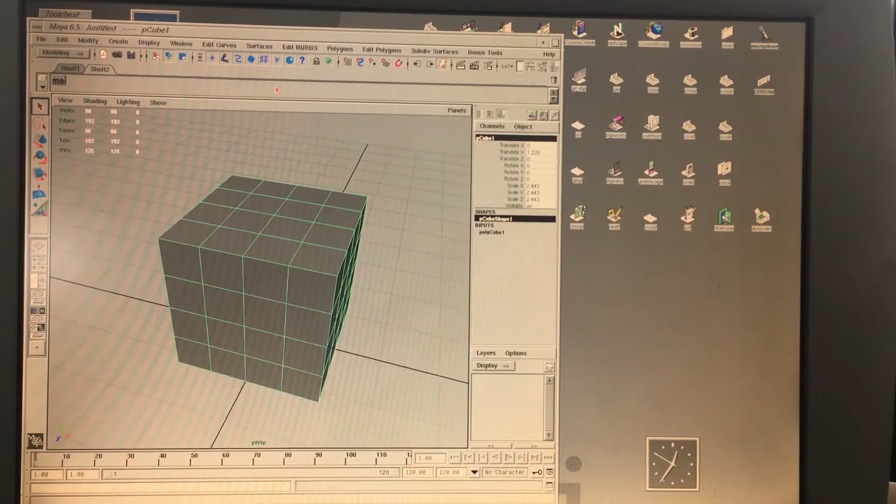So you would say, okay, I want to extrude edges, and you would go into the script editor here, and like I showed you in the last one, you can grab these commands. If we go script, we'll echo all commands, and we can tell it to spit out the commands that happen.

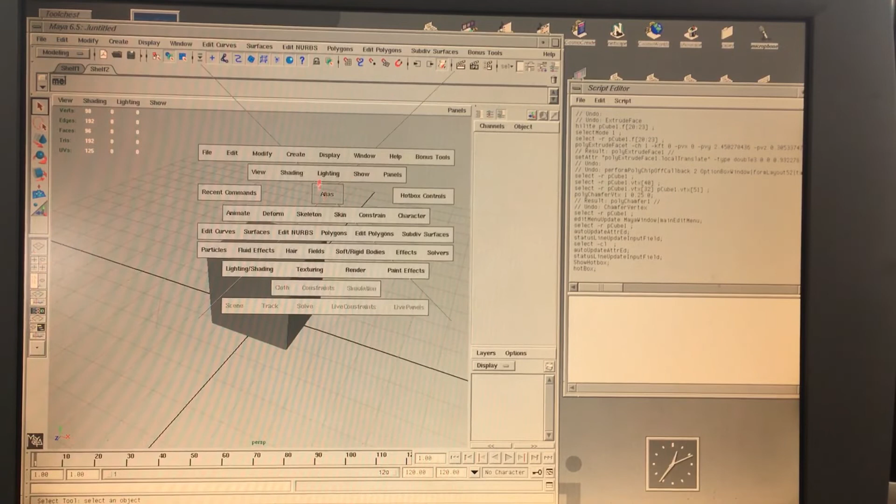And we go, okay, let's do another thing here. We'll space create - I'm about to show you the modeling context here in a little bit, but I need to give you some context before I can show you the modeling context. So open this guy up. We'll just turn this down to one big polygon. You go, okay, we want to get the edges.

I'll right click over it, switch to edge selection, and I'm going to select these two edges. And we go up here and go, okay, edit polygons, let's extrude this edge. This comes up here, and we can pull and extrude that, okay.

Now, this might be a common function that you do, so let's go up here and find out what it was. We'll bring the script editor over, and look at all this stuff here. We said extrude edge - so here's this, and I'm going to middle mouse drag this down here. You can see that's the command. What you can do is select that with the semicolon here, middle mouse drag this up here, and now you have that.

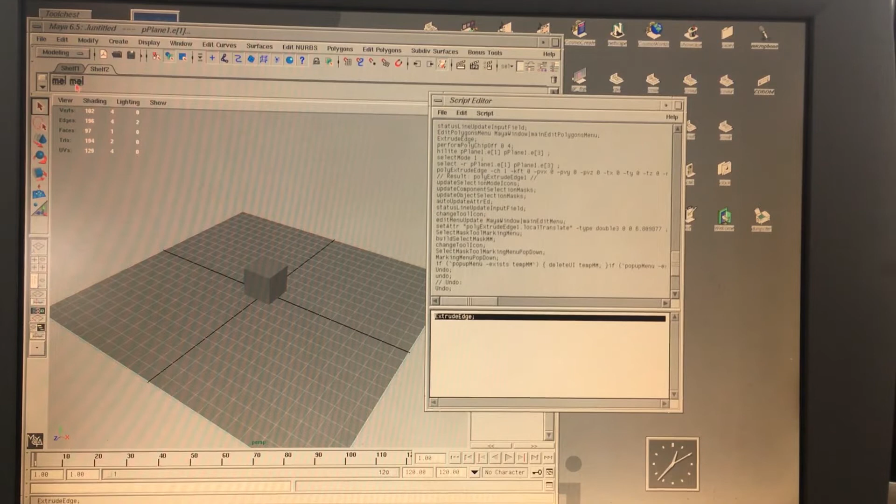And you're going to want to name these guys - you can float over them and see what they are, and you can even make your own icons. You can go into Photoshop and build icons and put those on there. Maybe I'll do that later in this video, show you how to put that together. And now you have these quick keys - so I've got this extrude edge here.

What else could we do? So if I have this object selected, and then grab these edges, you can just do this extrude edge here, and now have this command in a nice convenient place. Well, a lot of people do tools like that - they'll put either the hypershade window and the outliner and a bunch of different panels that they may need, like the graph editor.

You can save that once this spits out the command. When you fire it off the first time, you can save it and put it in places. I've done that here in my hotbox menu. If I hold spacebar and hit right click, you see I have a hypershade, graph, outliner, and UV window, so I can pull these up really easily. I don't have to go chase these things down wondering which one is the outliner or rendering editor or hypershade - just spacebar, right click, and I have this.

Now we can make our own, which we will - I'll show you how to do that. I'm also showing you just how you can make your own shelf if you like.

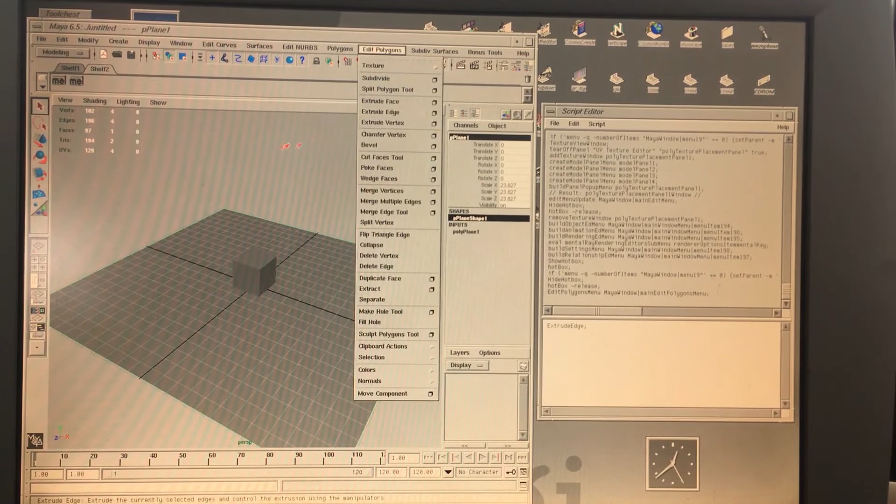Extrude edge is a useful tool. And then what else we have - chamfer vertex is useful. So we can grab that guy and use this, let's grab this thing here. We'll go chamfer vertex, and here it is right here. Grab this guy, middle mouse drag - so there's that command. Same thing, move it up here, and I have this.

So I'm kind of collecting the tools, and I'd make little icons for them in case I forget which one - I can just see it at a glance. So there's extrude edge and chamfer, and I'm making a shelf, and you can add new shelves.

You can do a new shelf, like this should be modeling tools only. So let's get rid of this guy. If you want to get rid of these guys here, you can middle mouse drag this guy all the way over here - there's a little garbage can icon, and you can get rid of it.

Then for this shelf here, we go into this little folder thing here and right click or click on this guy and say shelf editor, and I have some shelves here - shelf 1, shelf 2. I'll just rename shelf 2, you know, modeling underscore tools.

Alright, I didn't even need that - just put modeling, just call it that. So save shelves here - no, it didn't rename it. Why didn't you rename it? Shelf editor. Shelves. Okay, that's the one I wanted to rename. Let's try again. Modeling. There we go, modeling. Here we go. Still I gotta hit enter. Okay, so it's not quite as automated as I was hoping. Modeling, enter, okay there we go. And then I put shelf as like, you know, tools, enter - yeah, there we go.

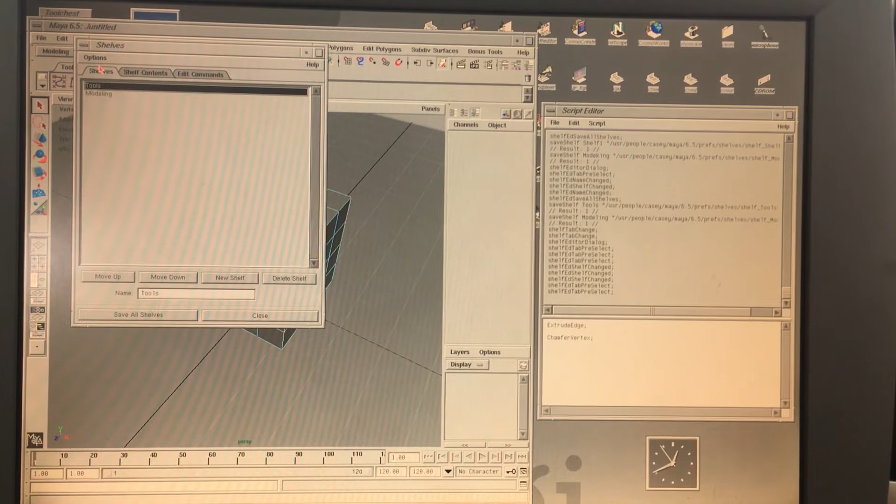So I go modeling or tools, go to tools, shelf contents. Okay, so here we have this - you can see here when you click on those tools that are on the tool menu, you see the little icon here, down here, and it gives you this change image option.

So there's that polycube, cone, and things, and then we could say, you know, change that image, and I imagine it would bring up a file browser, and there's these XPM files - you would have these XPM files for all kinds of things in Maya. There's a whole list, there's all these different things here, and I wonder if they even have more than you see here - there's so many in the icon folder.

So you'd make an XPM file, put it in your user alias wavefront Maya - this isn't the username slash Maya folder, which is where all your preferences are, this is the Maya software, where the program itself is. Then you could put an icon in there, and after you made it, save it to an XPM file and use it. Then point your script or function to it, and it would have a little icon that would help give you the hint of what it is versus just that generic Mel icon that comes with it.

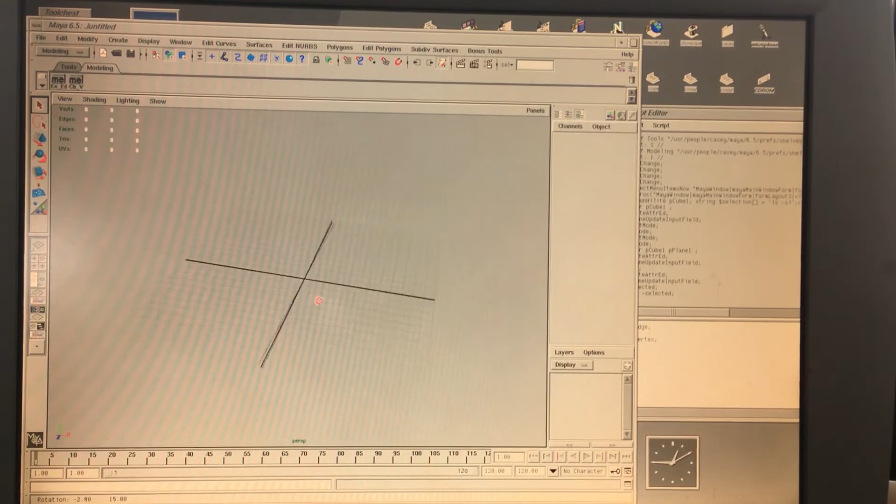Let me delete this guy here. I'm going to start out with a plane now. The shift right click is the modeling context marking menu. So if you have nothing selected and you do a shift right click, it brings up all this primitive creation stuff that I would use spacebar, create for, and then you got NURBS, polygons, subdivs, primitives.

And there's even one I'll link you to that gives you more functionality than just polygons, because right now this is mainly for polygon modeling, but a guy wrote one for Maya 6 and 7 that gives you a subdiv context menu too. So if nothing is selected, shift right click, you have the primitive creation.

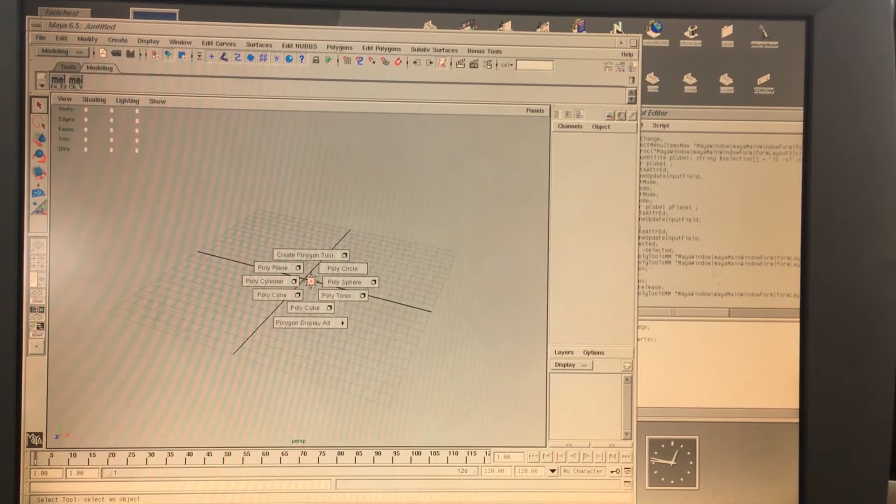So let's go here, we got plane, we'll create a plane, right click, or hit R, scale it up. I'll go in here, grab those guys, drag over so it's just one. And I'm going to turn the shading into wireframe unshaded, and then I'll turn off the grid. So we got this guy here.

And now if it's selected and I shift right click, the menu is no longer making primitives. Because I have it selected, it's giving me object context tools. So instead of having to go look for specific tools that only affect the object level, I have all these tools here that are useful when you have an object selected for modeling. So you have separate and combine, which is useful really quickly. You have smooth, which just smooths out the polygons.

You have draw the split tool, split polygons, sculpt, which we didn't cover. I'll have to show you some sculpting stuff this time. Merge edge, cut faces, append to polygon, and these are really useful when you're in this object mode.

And then if you go right click to the face mode and you have this face selected, and you shift right click, that same shift right click menu changes again depending on the selection. So now you have poke faces, extrude faces, wedge, subdivide, paint. You can do polygon toggles, so you have this polygon display.

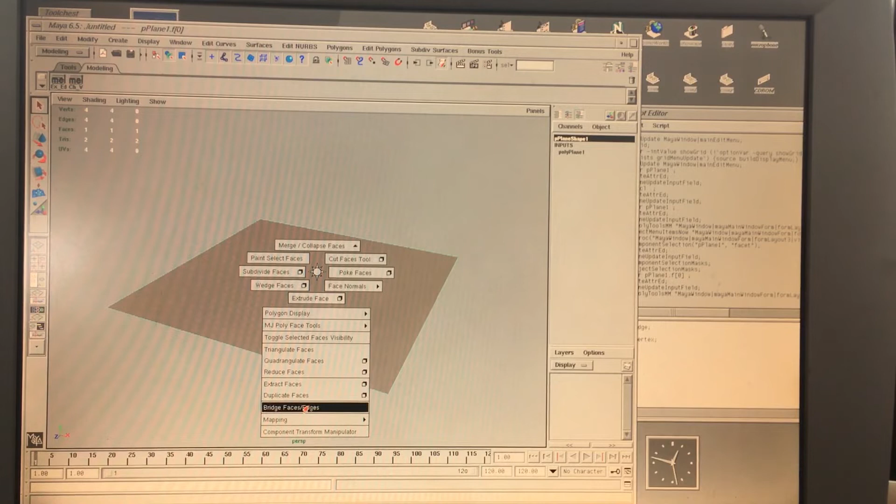This isn't here yet. This MJ Poly tools is included in this menu, but we don't have the MJ Poly tools. And those are pretty useful because they have like loop selections. Triangulate faces, quad faces, extract faces is just to pull individual faces out to separate objects. You bridge faces, I use the bridge a lot. That's pretty cool.

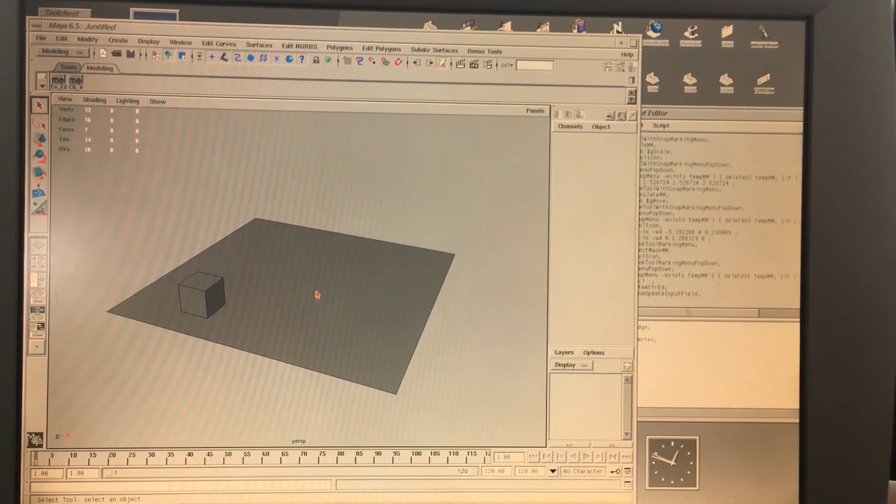So let's go back, let's deselect. So with nothing selected, shift right click brings up the primitive. So then we can go create a cube. And then let's scale this guy over, control drag this guy, bring him up here, deselect, shift right click, polysphere, shift drag this guy up. See how quickly the interaction is here.

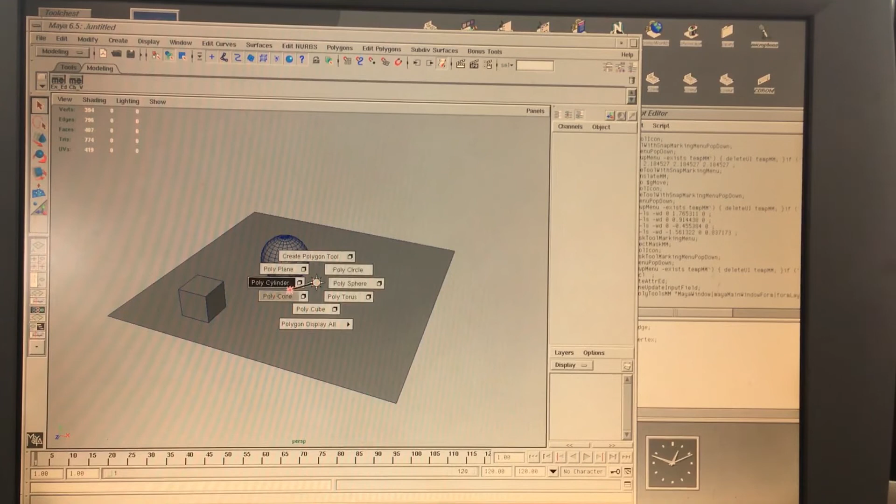This is a way more elegant way to work with Maya, because now the menuing and functionality is way more elegant. Deselect that, nothing selected, shift right click. Let's create a cone. Again, this is how quickly this is to interact with. So I'll scale that guy up. See, put it on the floor.

And let's see here, I'll do this guy, raise the cube subdivisions, and we'll go mess with some of the modeling tools here. So we'll get that guy up here, focus in. Okay, let's do something on the sphere here. I'll click this guy, hit F, zoom in, and let's start messing with the object context. So with the object selected, shift right click brings up, let's do split polygon tool.

So now I can draw some shapes on this guy. So I'll put this guy here. I'm going to start reaching across. Does this one have the snap? Oh, this one doesn't have the snap. But we'll start drawing a, oh, it does have the snap. You just got to play with it a little bit. So draw this guy here, wait till it snaps. Draw this here. Snapping it in the middle. There we go, and then I'll finish it by going up here, hit enter. So I've created that shape.

Now I want to do the edge, and we'll pull that guy in a little bit. Let's hit F, and we'll pull this guy down inwards. So we're kind of making a little machined edge here on the side of a sphere. And now with that edge selected, instead of having to go find it, I want to use the edge tool. So shift right click brings up the edge thing. And let's do the bevel edge. And it breaks it out like that.

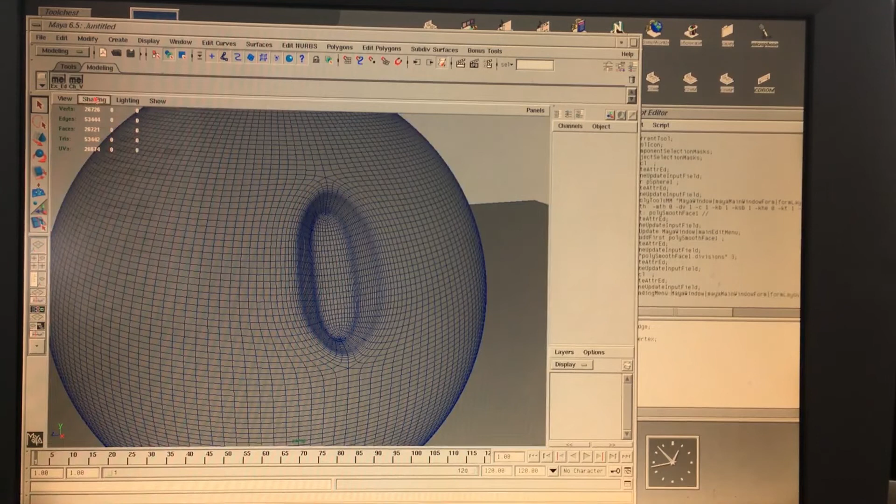Deselect this guy, and we'll turn off the wireframe on shaded. There we go. So I've created a neat little piece; put three of those in a row, and it looks like some mech suit feature detail. You can see this is really useful for a lot of different modeling functions. Let's hide that guy, it's pretty high in poly.

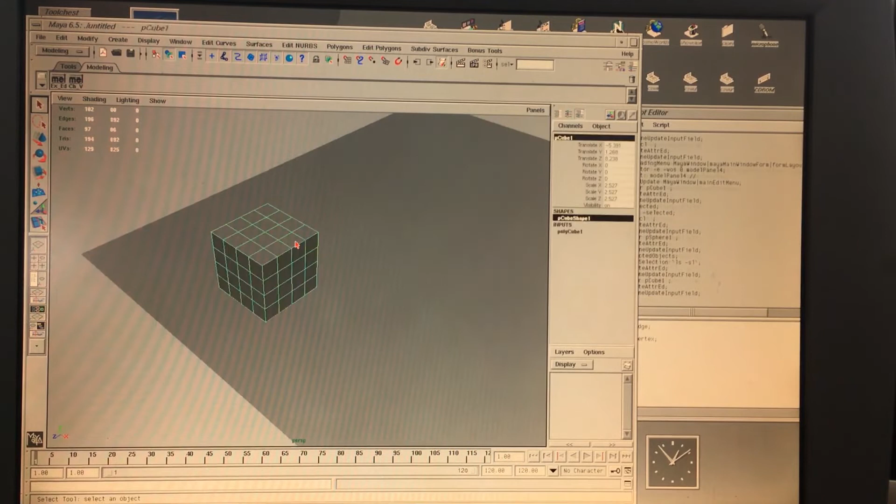Deselect, shift right click, I'll create a cylinder, kind of what we did in the other video. It just allows me to get to things faster. I'll pull this guy up here, zoom in. Let's make this 8-sided, and do the things we were doing before. Show, isolate select, this character only. Now we're using the marking menus to do what I showed you before.

We'll right click, grab these middle verts here. Now that we're in vert selection, shift right click again, and it brings up chamfer vertex. Let's go down to face selection, right click and hold over the object, shift select the first poly, shift select the second poly. I'm going to hit R for scale, and hit control on the Y, so we're only scaling here.

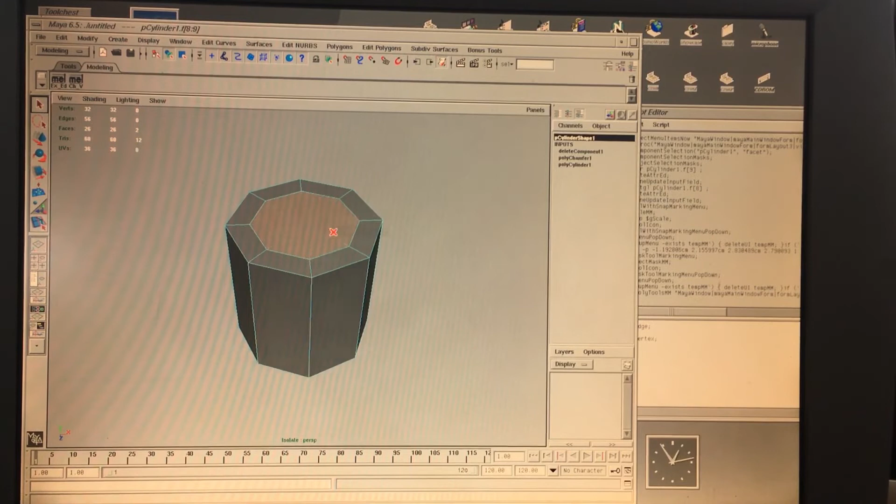And then shift right click on that. So now we got poke faces. There we go. Hit the edge tool and select every other edge, so we can make these triangles into quads. Same thing with the bottom, shift clicking along the way to add to our selection. Then shift right click, and there's the edge context menu, the same shift right click everywhere depending on your selection. Delete that edge, and there we go.

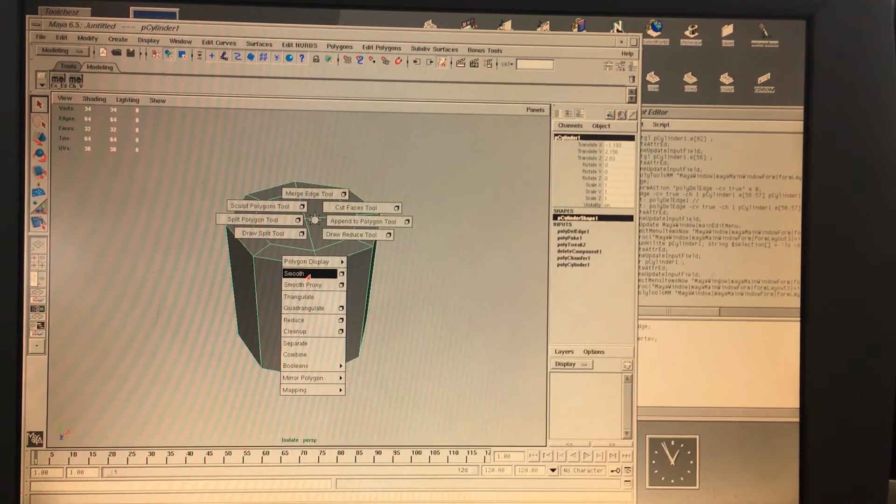Right click here, holding the right click down to put it in object mode. Shift right click at the object level, and let's use smooth polygon. Or we could even convert, although convert isn't here. It's something we could add to a different marking menu, which I'll show you how to do next. So let's smooth that. And we don't have enough spans here.

We'll just do the old cut tool. Hit spacebar out to the quad view, spacebar into the view. Shift right click, cut faces tool. One here, one here, one here.

Let's see, I'm going to grab those edges, and grab them all, and it grabs not only this across, but these, so then I have to control left click to pull the other selections off. So I just have this edge here, and then I can use the move tool to space it more similar to the one above. Same with this, I'll do that, grabbing all the edges, control left drag, control left drag, and then I can use the move tool to push this guy up here.

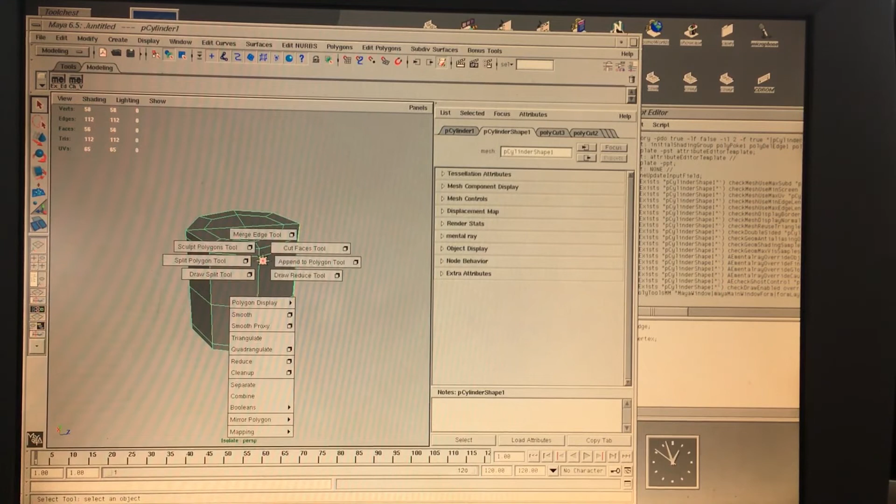There's that, and now we've got enough subdivs that won't bow out into a thing, unless that's what you want. But I put these closer so it'll be a little bit more thing. Shift right click again, smooth. Now it's a little bit more like a true cylinder. It's poly smooth face, divisions by 3, enter. There's our item.

As you can see, that right click modeling context menu can save you tons of time. So create primitives, select an object, object modification, select faces, shift right click, you got face modification, edge selection, you got edge tools here. I do wish that we had this. See here, you have this select loop, this is grayed out. And I think it's because I need to install these poly edge tools. But the select loop is cool. There's an even ring and edge loop split.

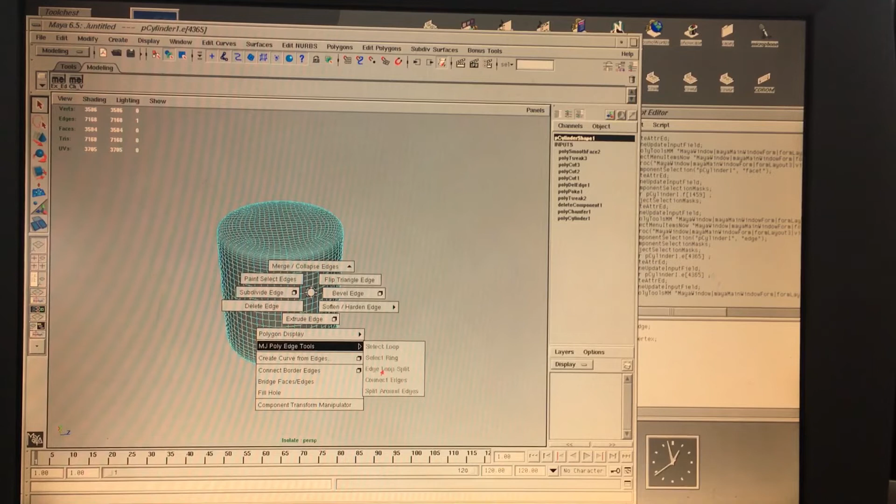This is what we're looking for, because if you have this edge and you do a split, it'll give you a new edge loop. That's what I was doing with that cut faces tool. I can select all the edges, and so if I would say select this edge and then this edge, and I'd shift right click using this with the select ring, the ring will go around this way with them, or you can select a loop, which would make that whole line here. A ring is like the parallel line, so it would go to every one of these along there.

And then when I would use the next tool, which is the edge loop split, what is the modern thing called an edge loop, it would put a line through the center of all these, which allows you to add edge loops really easy. So we have to figure out how to get those MJ Poly tools in this version. And it's amazing they've been around since then, because they're still available on a few high-end 3D and whatnot.

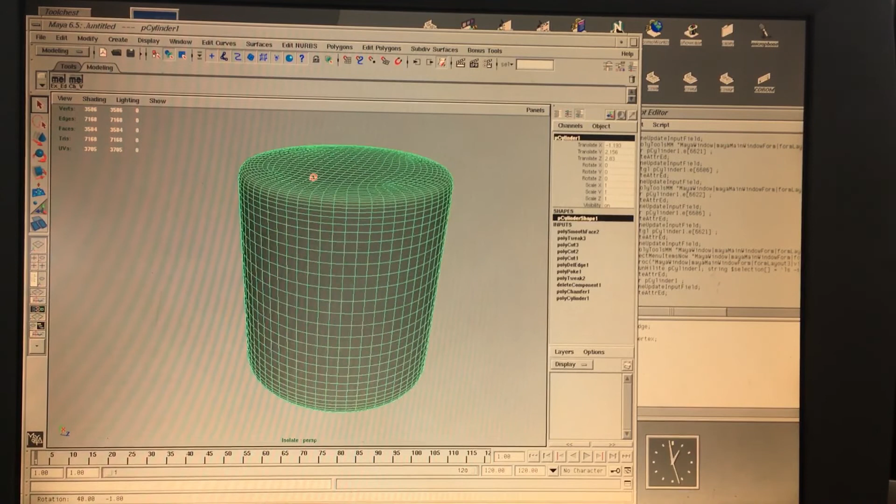Okay, that's one thing. Let's see what else we're gonna do. Make our own marking menus here. So let's look at that. I'll show you how to make one that's similar to the one that I use in the hotbox. We'll just make it clean in the hotbox. So it's like this. I use UV, outliner, graph, which is for the animation curves, and Hypershade to bring up the Hypershade like I had before. Makes it easier because Hypershade's got a couple of menus. You go in here and then you have to go to the rendering editors and go find it. And so having a quick way to get in and out of the Hypershade is really handy.

And if you don't want to bring up the outliner perspective view because you're jumping between the two different views here, you can also just have a floating outliner and get to it here without having to dock to anything. So those are quick little things. Let's try to make those. So I got tools, I got modeling, and let's go here and we'll make a new shelf. We'll do new shelf, just so we can grab our tools that we need for the marking menu.

I can show you a couple ways here. So this will be Windows, like UI, I'll call it right now. Hit OK, and what we're going to do is we're just going to grab what we need here. Now in newer Mayas, I'm going to test this right now. In newer Mayas, there is functionality where, well, this thing's banging around the cup a lot. There's functionality where if you Control-Shift-click an item, it takes whatever you click and puts it on the current selected shelf. I don't know if that's how this works now, but I'll try.

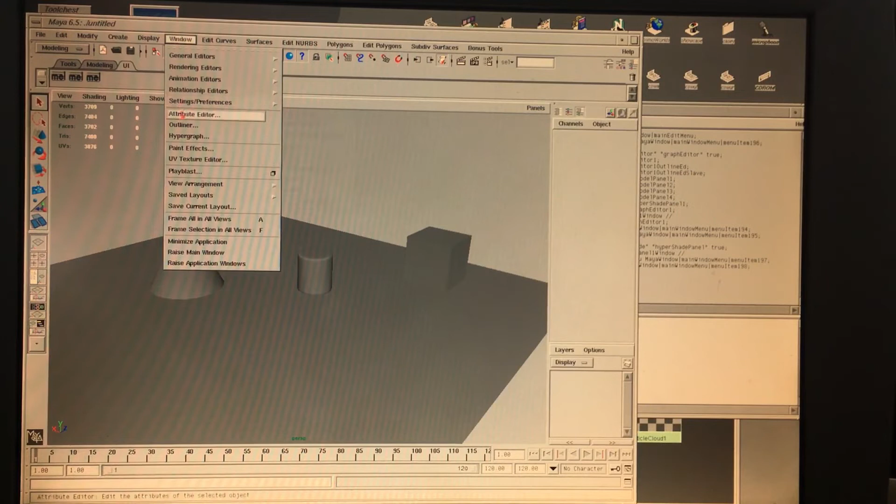We have the Hypershade, the outliner. Oh, we didn't grab the Hypershade, even though I have it. Rendering editors, Hypershade. It's down here, Hypershade window. Drag that guy here. What else do we like? The UV window is the UV texture editor. Something to look at there, and that one should be called texture view window. Yeah. So move this guy out of the way. Texture view window.

Now, what are other ones that I haven't used in the current Maya? There's one that's really handy, this thing. It's an attribute spreadsheet, allows you to change multiple attributes at once. So I like having that one available. This is pretty cool when you have an item selected. Like, let's do the cone, let's do all those. Grab this character here. And now you see that there's this list on the right, and all the similar properties are parallel with each other.

So this one shows you each one's translate X, its visibility, translate Y. You can see the different stats all in one place. It's pretty neat. And you have, this is keyable, this is the shape node keyable. There's some transform information, rotate, scale, and the render stuff's interesting too, because you can turn on and off whether motion blur is enabled. And especially if you use OBJ files, if you import an OBJ file and you don't see it in the reflections or refractions, it's because this is turned off.

And you can see here, if I wanted to make this all visible and refraction turned off, I can drag across this like I did with the channel box here, hit 0. And I've changed the stats for all three of them. Otherwise I'd have to go click, off, click, off, click, off. I've just looked at the attribute spreadsheet with them all selected. I can slide all the way down here, press 1 for on, and it flips them all on. This is a way to mass invoke a lot of stats over multiple objects.

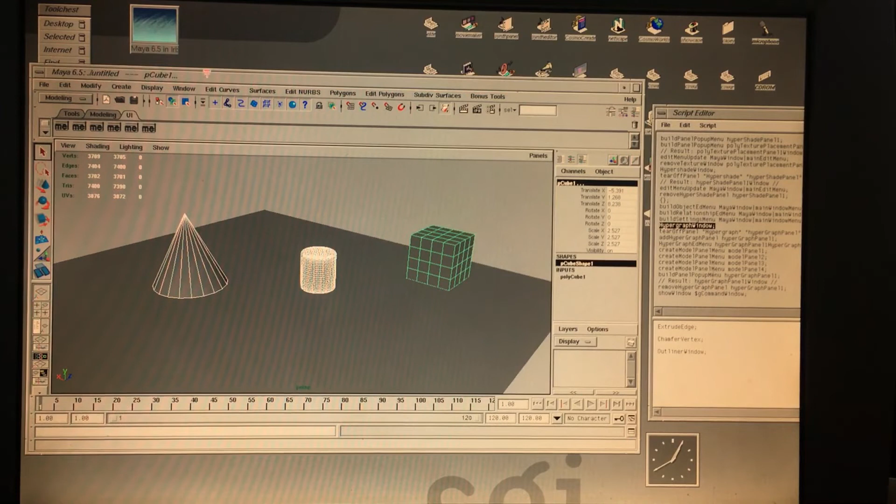All right, so we'll pull this open here, and under Window, under Settings and Preferences, there's this thing called Marking Menus. There's also a thing for hotkeys too, which you can get into, but here's Marking Menus. I'm going to click that, and this interesting little interface comes up, and you see I have a couple. I have a hotbox and another hotbox here, Hbox and hotbox. Let's see if I have anything in here. Okay, I have nothing in here. Oh, I don't want to do that. Go back, marking menus.

Okay, I'm going to delete that one. Do not back up. I'm going to create one, and name it in here. And you can see it has almost the hotbox layout. There's some slots here you can drop things in. And we'll call this menu Quick UI.

And we'll move this over here. What I want to do is like the hypershade at the top. So if I look at this one here is outliner. I like outliner to the left because it's like you're pointing that direction where the outliner button is, and the outliner's on the left. So I'll usually take the outliner and middle mouse drag that over to here.

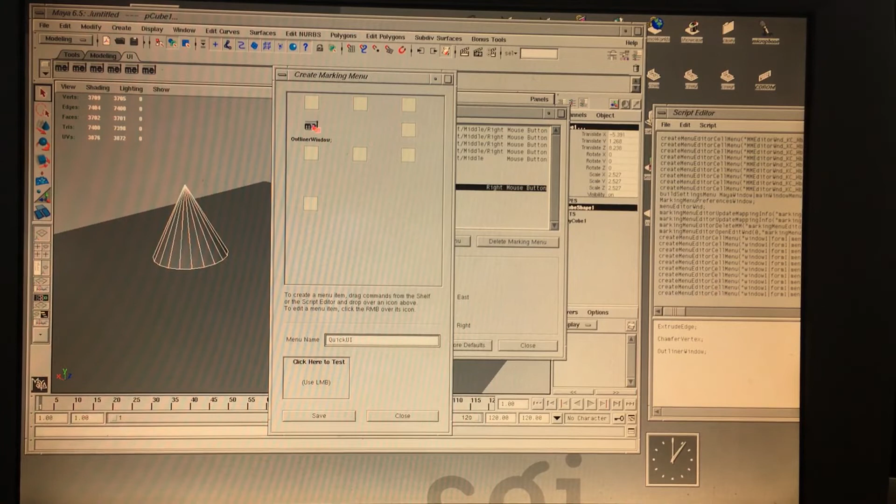It says outliner window, and when you're on this character, you can click that. You have to be very careful about what you click on this thing, or it'll turn it off. So I didn't save it, so I have to start. This is good for you to see, because there's a few ways this thing breaks.

So let's try again. I'm gonna create a marking menu. I didn't name it and save it. So under here we'll do Quick UI, and I'm gonna save it, and it should do that. I'm going to close it out, and now it should be at least saved.

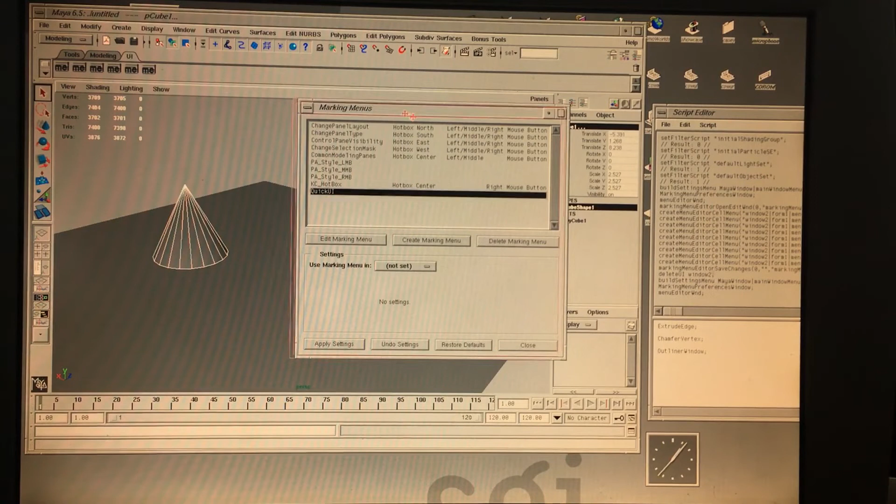So let's see here, marking menus. This is very tricky, the way it can turn on and off here. So now because that's there, the Quick UI can edit the marking menu and brings it up. Okay, now when we save it, we can do stuff.

So I need the outliner here. Let's see, graph editor, outliner, middle mouse, drag that here. I like the graph editor upper left here. I like the hypershade above. See, there's texture view, so put the hypershade up here.

Texture view is the UV window, it's down here. And I got this attribute spreadsheet I like putting way below. And what else? We got hypergraph window, so this will show us what's connected to what. And then what else would I use over here? This would be a different hierarchy. But this is a pretty good start.

And what we want to do is we want to modify these, because it's going to say what these are. See the text in each one. So I'm going to change that. We're going to edit each one so it's a little bit more brief than what all those words there. So I'm going to right click this one at the top and say edit menu item, and it brings this up and it shows you what's inside.

And so it's got, hey, I'll use this icon. So you can make these special icons just like you saw with the other shelves. You can point it to an icon in the icon folder. Just if you have a name.xpm in there in the icon folder, it'll find it and use it. And so we have hypershade window. So here's the command. You don't want to modify this because this is the mel command it's going to do, but here is just a label. So I'm going to remove that window part with that semicolon, just call that hypershade, and then save and close.

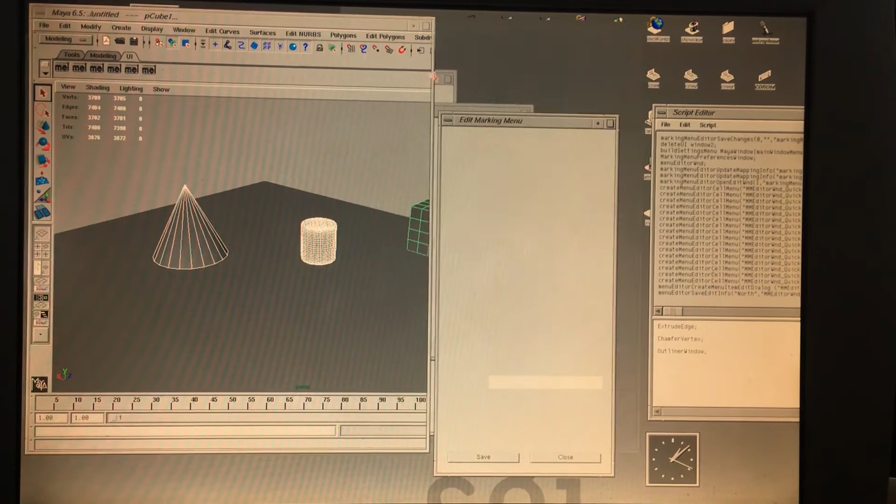And it closes the whole thing out again. Closes that, puts it behind. Let me try to get this so it's not right over the top of Maya so we don't lose it every time. So now you can see that it says hypershade, and now I'm going to go over here, the same thing, edit menu item, remove the editor part and just leave the graph.

Save and close. Right click on this one. Just cleaning this up so we can change the labels. Edit menu item. And like I said, if you want to make your own XPM files to make little icons that you would recognize, that's definitely encouraged. I'm just going to call this UV.

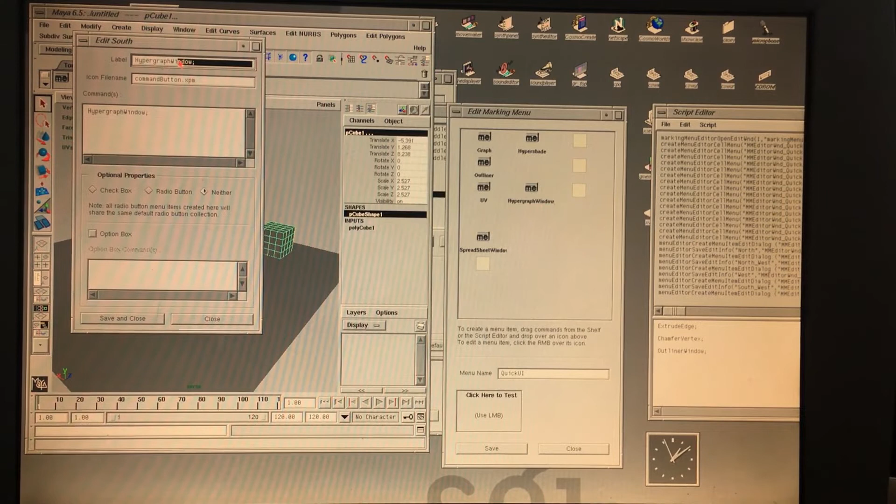It's easy. And edit menu item, hypergraph. Here, save and close. And edit menu here. And I just call this one, since it's an attribute spreadsheet, I go attr.ss, attribute spreadsheet, save. So that's easy for me to see. Okay, so save that.

Let that save across here. Now if I test this, you can see, use left mouse button. You can test it, and you can see it's got your little items in here.

And then we need to assign this to a hotkey. So I save that, close once that's saved. Now we have to assign this to something. In this one here, I assigned it - you can hide Hotbox or Hotkey Editor. My original one's up there. I'm going to use this quick key, the one I made, the Quick01. Let's go down here and use the Hotkey Editor.

And it's not set yet. So it says the marking menu will be available for editing in the Hotkey Editor. Apply settings, and now it says accessible in the Hotkey Editor.

So now we're going to go to Windows, Settings and Preferences, and go into Hotkeys. We're going to give this little menu a place to live. What you want to do is go into the categories, and you have to go all the way down to the bottom where it says User Marking Menu - these are the custom ones. There's just one there because that's the only one that's assigned.

And you've got to press and release. If you assign the press, it'll ask you to assign the release the same - letting it go will take it away. That's usually the standard thing.

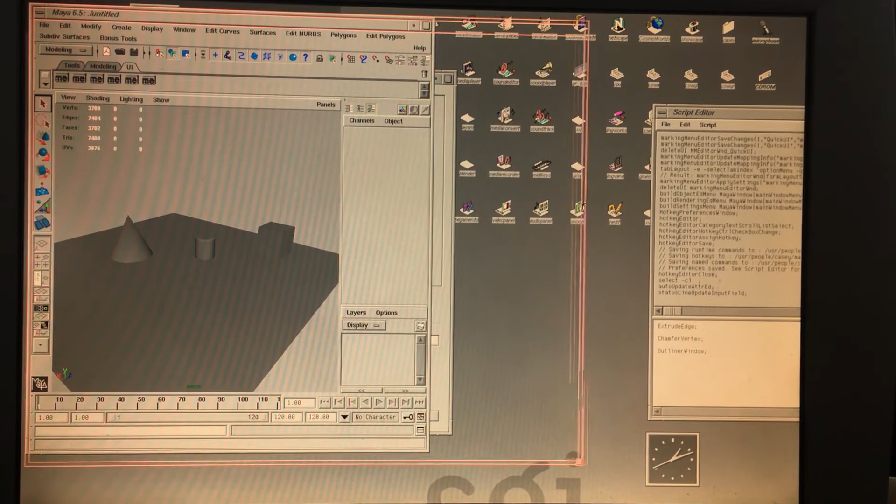We should be able to turn on the shading here, wireframe on shaded. Now I can get those menus - if I hit Control Shift Z and then left click, there's my menu, so I can invoke any of these.

I don't even have the whole hotbox. Before I had right click, spacebar right click, and it's kind of in the middle of the hotbox, which is quick. But now I just do Control Shift Z left click, and I can grab the graph and change my animation curves here - there's no animation, so nothing shows up.

I can shift click these guys and then Control Shift Z left click. I want to look at the attribute spreadsheet, and now here we are at the spreadsheet. And then what else do we want to do?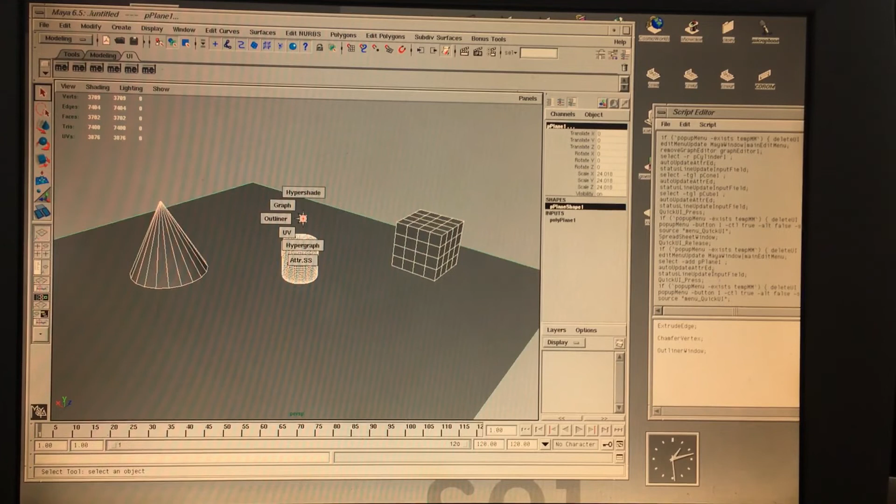We want to do Control Shift Z for the outliner - you get to your items real quick if you don't already have an outliner open, with this button here. So these are quick ways.

Oh, I just need to check out the hypershade - Control Shift Z left click, grab the hypershade. So this is a way faster way of getting around Maya if you understand how the UI works and the way you can customize it.

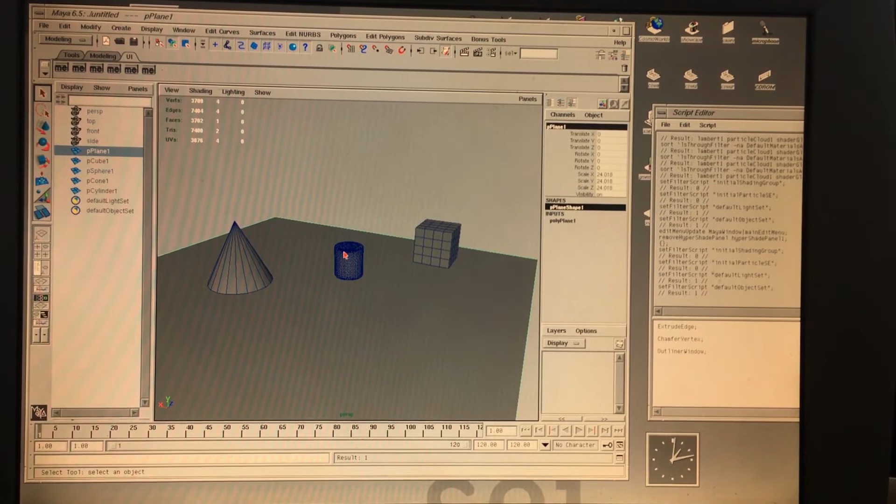One more thing I wanted to show you before we finish the video - yeah, we're coming around an hour here - is how to create macro functions. That involves a little bit of understanding of Maya scripting, more than just taking the command and applying it to a button - it's about creating multiple functions that happen all together in one. You can do it with modeling functions, but one of the ways I like to show people in the first tutorials is to create...

We'll do another shelf here, like a new shelf - we'll call this one Render. And we'll hit OK.

Here what we're going to do is create a high and low, like a preview or a production setting. That's available when you go to render globals. You can save these things - they have this preset option. So when you make the preset how you want, with everything set up, let's go here and we'll make it mental ray.

This is kind of like the last tutorial settings I'm going to use, but we'll do a few more things. And look at all that stuff it's making.

Go over to the mental ray tab, and then there's a few things we can create here. So they have these presets already, like you can create this draft, and then they have preview, which is a little higher, and then production, which is even a little higher. And this is mainly saved because you can save the presets in the render settings, which is fine for you to do stuff. But maybe you want to be a little bit more specific.

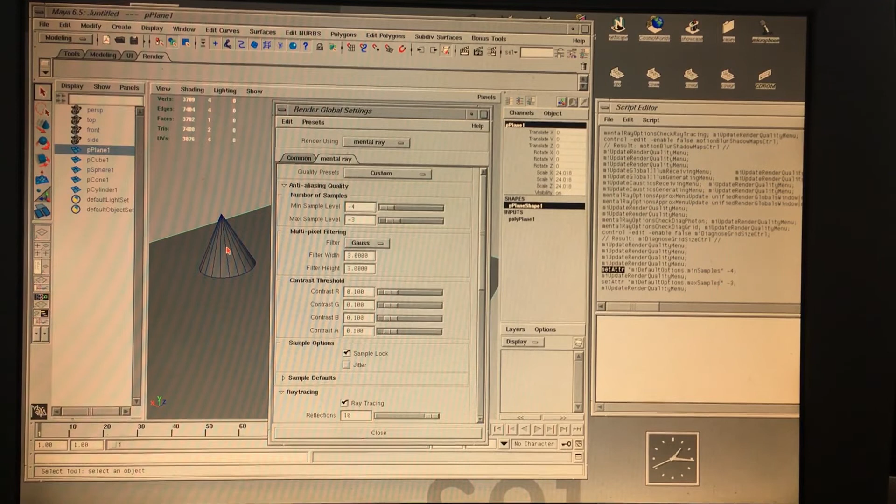You can have it spit out, like if you want to grab the position of something, you know, I'm selecting this. There's one you use a lot, which is select, which is a select command you use a lot. Select, you know, flag R, like -R is recursive, or select add, which would be adding something here.

Let's deselect and try this here. Just kind of show you playing around with mel. So I got select R cone, and then let's copy this here. You can use the add key here, enter, Control V, and then instead of R, I'll hit A.

I think I can add, right? Or do I have to actually type the whole thing? Control, right click. It's a valid flag. I guess I have to do add, ADD. Select add to selection, pcone1. There we go, so it selects it.

So, but what we're gonna do is we'll do pcube1. So I have this select, I'm showing you how to do multiple commands. So select recursively the pcone, so it lets go. R is gonna let go of whatever and then select it. So recursive is like starting over.

And then we want to get the pcube, so I'm going to type this up here. It's pcube1, so I'll type CUBE, that's the transform name. And so now I'm selecting the R cone and I'm selecting adding. I'm not going to deselect the cone, I'm going to add it to the cube. And so I run those two together by selecting.

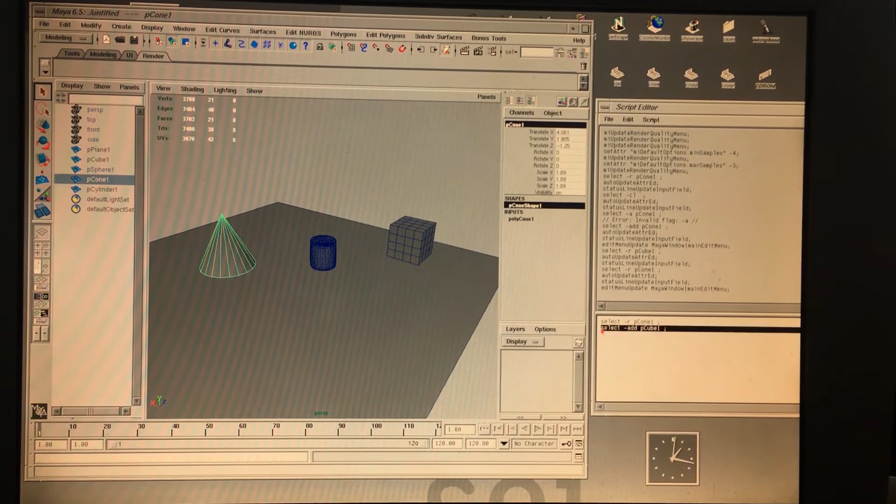You hit Control and enter if you hold Control and hit the enter on the far right, the numeric pad enter, while holding Control, it won't make the text disappear. It won't empty the text from your text editor. It'll execute it and leave it there. So Control Enter, and you can see that, yeah, it's done both those commands. And so this is like stacking mel, so you can do multiple things.

Not in this tutorial, I could point you towards one where you learn how to do the variables, like saving something in a string, and then when you're not selecting something. I'll show you, but I'll try to show you real quick, though it won't click right away. But you can save things in Maya to variables using mel, and then that becomes something that you use in like a for loop to do one thing multiple times to multiple objects.

So like if I wanted to save this selection, let's see if this works in the same way in the old Maya. Here we go: string, dollar sign, my lowercase, uppercase S, EL. I'll make it an array, so it's the brackets, and I'll hit this, and that will equal the command.

ls -sl, and I have to put those little quotation marks up there. And so this is me saying save into this variable string this command, which is list your selection. This is stuff you learn over time.

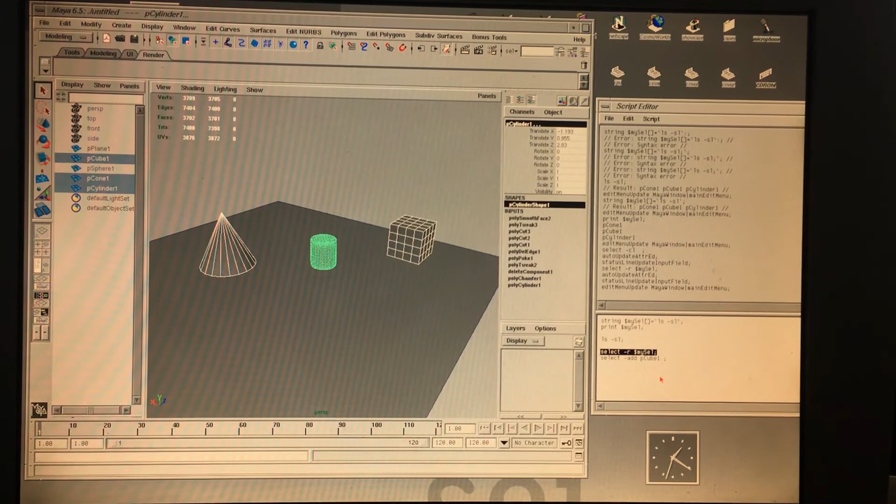I'll just give you a quick example: you can do that with modeling tools. There's a lot of things you can do there. You can create a for loop so it saves items into a selection, and then it runs all those items through all the commands in a for loop. So for every item in an array, do this, and you can have a whole bunch of commands happen to multiple items in one simple command.

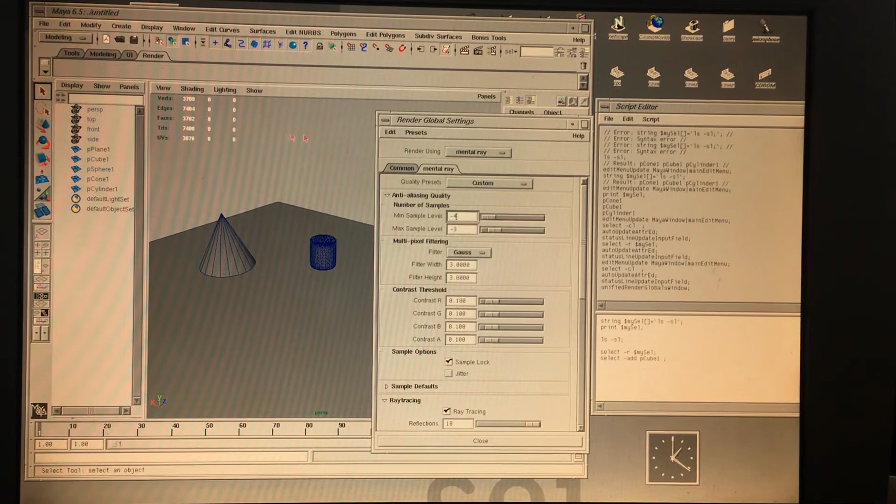But what we're going to do is use this to save a couple of settings for Mental Ray here. So get rid of all this. We want to save these things. So let's clear the history, and we just want to get some stats from Mental Ray. So I want to hit this thing. I'll hit -4, hit enter. It says set the attribute to this. So setAttr miDefaultOptions.minSamples, and that's in quotes so it knows to look for that, and -4 is the setting.

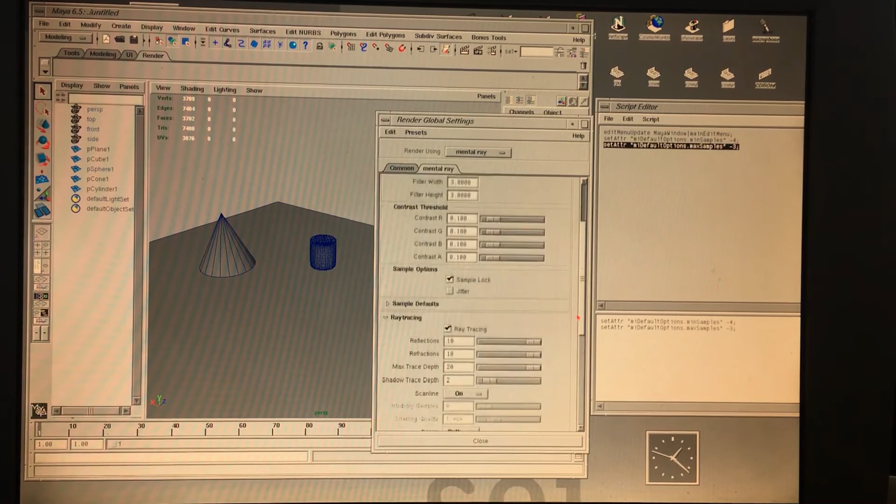And then we got this here, 3, enter. Same thing, I'm grabbing this one it spits out, dragging this down here. Whoops, get that at the end, hit enter. And that's our setting here. Ray tracing is already set up. So we have this setAttr, so you could have saved it in Mental Ray.

You have this custom thing, you can save them here, or you can use those custom presets. But what we're going to do is create these buttons here so you can set these things high and low for yourself. So instead of going in here and turning on these menus, we just have a quick little button that lets you switch the quality really quickly. So for previews, we got these 2 commands in a row. Default options, minimum samples -4. Mental images default options dot max samples -3.

I'm going to middle mouse drag those guys here. We'll go in here and go to the shelf editor, and this is edit command. So there's the 2 commands together. There's the contents, and we'll call this min, or we can call it low, whatever makes more sense to you.

And then we'll do another one that's a little easier to see. So if you have -2, -1, grab all those guys here, and then we'll do one that is a higher quality, which is -1 and regular 1.

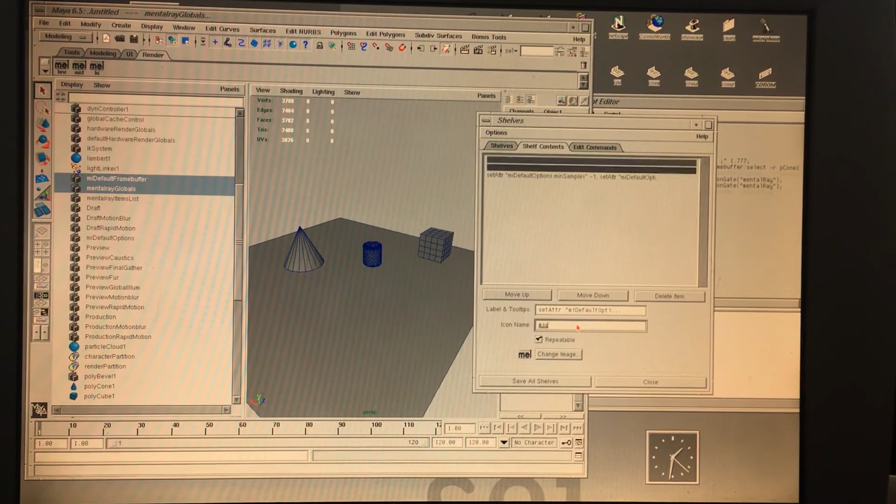Didn't save the mid here. MID, enter, save all shelves. So now we have this quick way of setting our settings here. So let's watch this. So we have this too. So it's committing 2 commands every time.

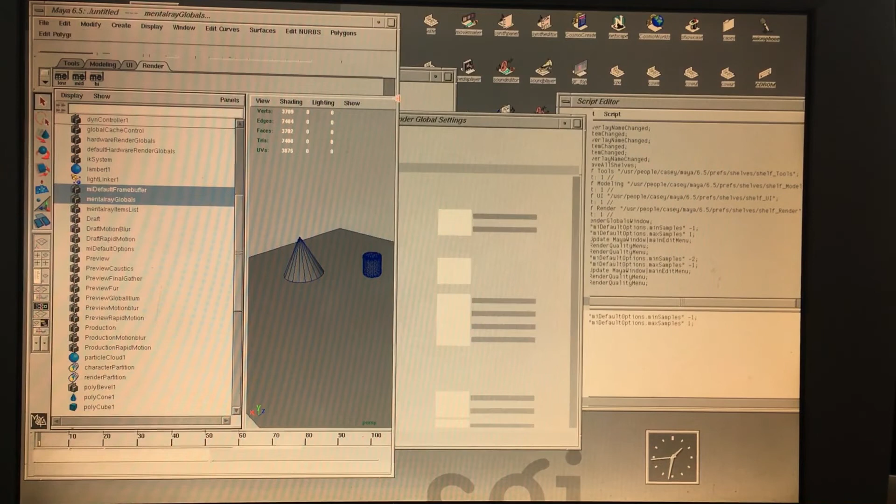So if we're on low, let's hit high. See, it sets them. -1, 1. You can see that it's running those commands. Let's set it to medium. Oh, move that out of the way also. So there it is, -2, -1, low, medium, high. And it's just running those commands in a row with each other. So we have that set up for MentalRay.

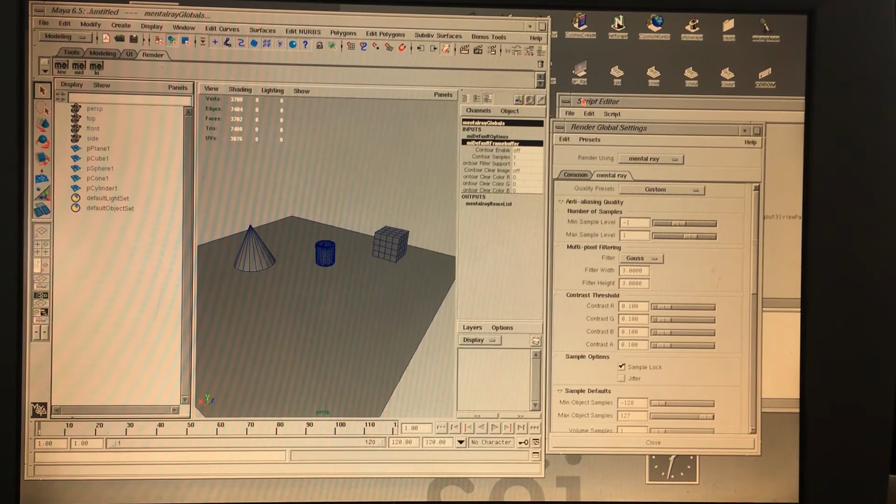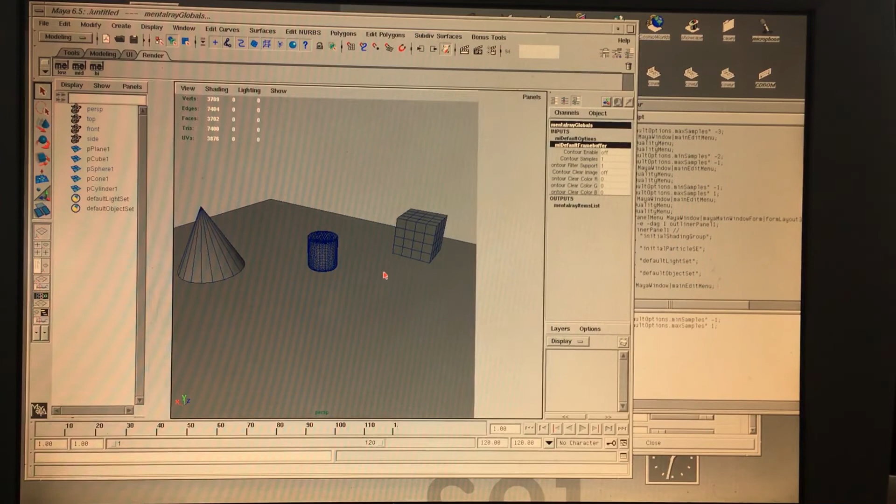So, okay, let's look at this light setting here. One thing I didn't show you, let's turn this DAG objects off because I was trying to find that. One thing I didn't do last time was we ended up using the area light to light the scene, but I used the quadratic fall off, which is a more physically accurate fall off as far as the light transport goes, but you end up fighting with the hot spot versus the dark spot. And so even though it's a nice fall off, it's an accurate fall off, there's these aspects to it. You have to keep balancing the shaders.

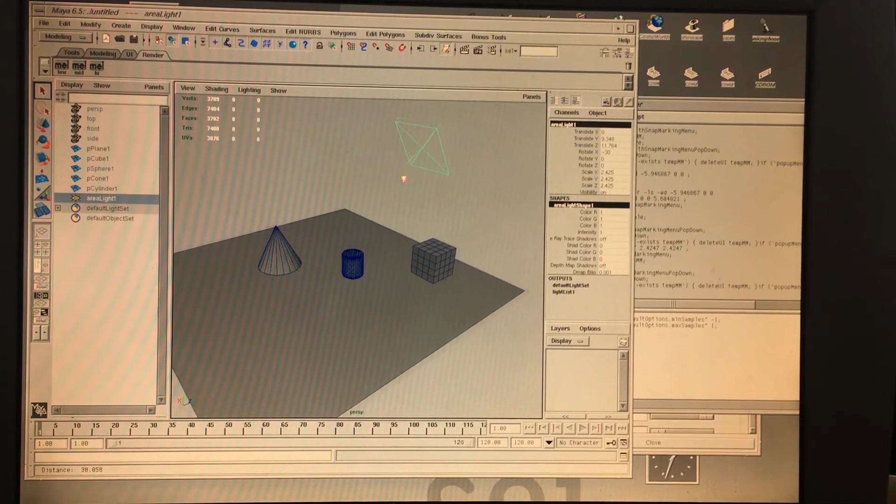And so one of the things I wanted to do, which I should have done last time, is space bar, create an area light here, and we'll set this one up so that it is set with the linear fall off. It's not physically accurate, but it gives you a way easier spread for the quality of the lighting. So you do get a fall off, and it feels nice in photoreal. So with the decay, let's use linear instead of quadratic. The shadows is the same. We're going to go down to shadows, use ray trace, and I usually just turn this up to 8. It's a good default.

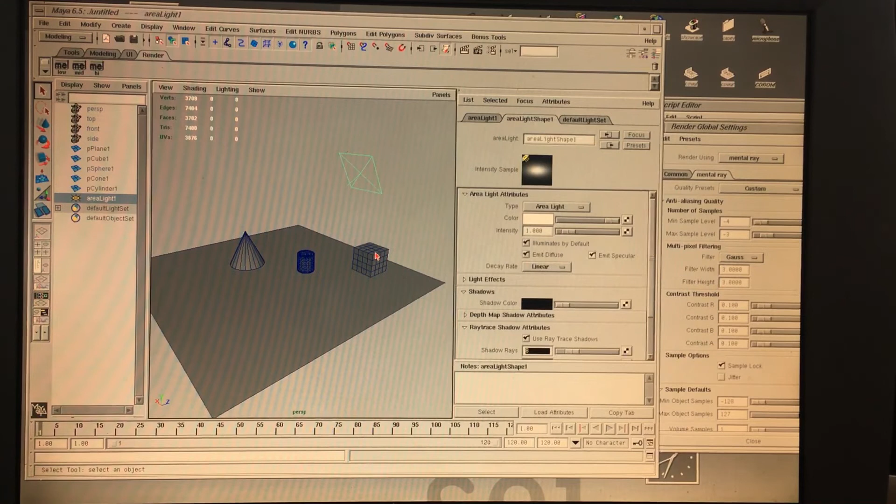Okay, so now we just want our low settings. Let's get our MentalRay up here. Put on low. And maybe before we do that, we'll smooth these guys out. So I'll go down here, and let's see, what can we do? We can round this guy out. Let's go to the channel box. This polycube. Let's do 3 divisions, maybe. Or maybe, I don't know if the bevel works the same on this newer Maya. Let's try 1 real quick, and see if the edge bevel works the same in the new one with the corners.

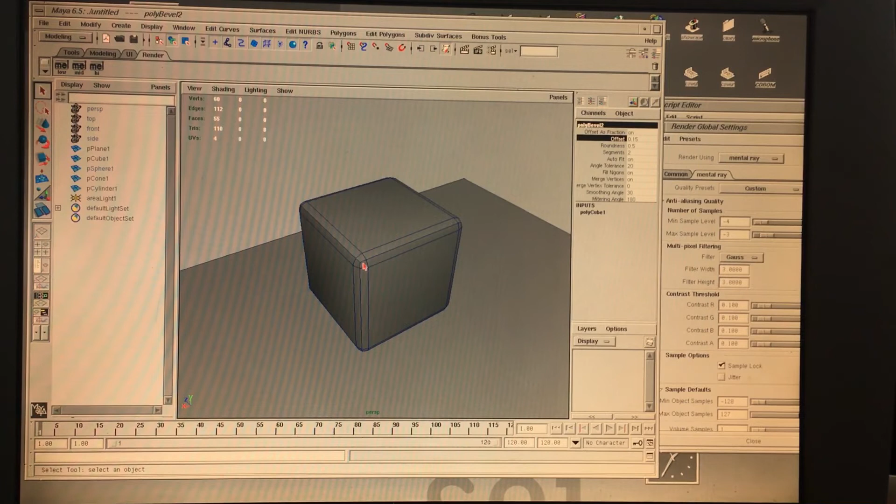Okay, I've got all those guys. Shift right click like we were looking before. I've got this bevel edge. Let's see if it works with the corners, because the newer Mayas have this segmenting. Oh, it does. Wow, look at that. See how it caps the corners nice? That's great. So now it's as if I added edge loops, and then I'll just use the offset, middle mouse drag, hold control shift when you middle mouse drag, you can get it in there. So now we've got a nice cube that can be rounded really easily, because it puts nice quads on the corners. This is a really cool feature I use all the time in even the newer Mayas.

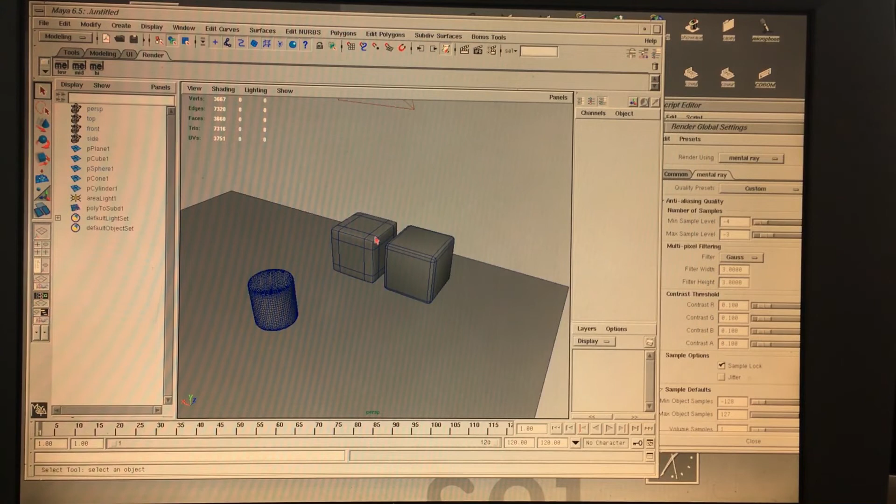So now we have that. We could convert that to a subdiv, or we could smooth it out like this. Let's see how it converts. Modify, convert. Control D so I can duplicate it here. Modify, convert polys to subdivs. Let's see how well it subdivides. Yeah, looks pretty good. Then hit 3. And that looks pretty good. And then we got this, shift right click, and we'll just use the smooth on that guy. And I'll put the divisions up to 3. That looks pretty good too.

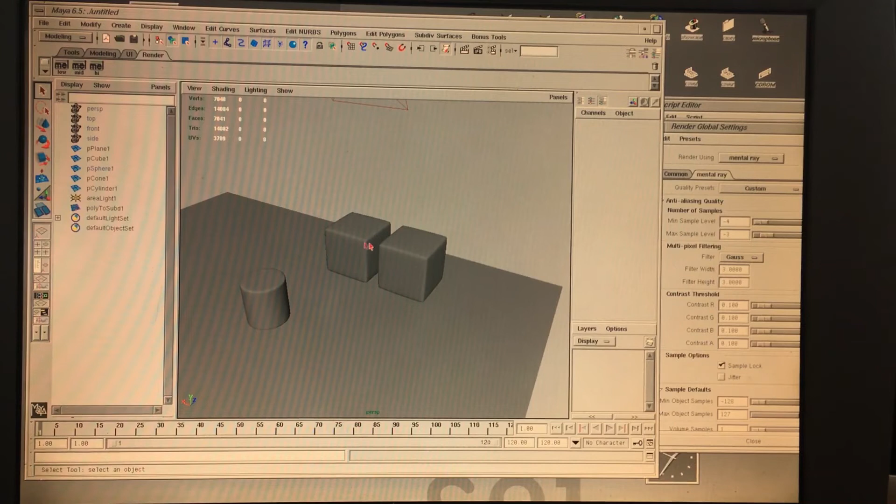So let's turn off the wireframe on shaded. That's another thing I could probably make a quick key for, turning that on and off. Let's see, fit. Yeah, boy, that looks really good. This is like what I get in my modern Maya, because I just convert the polygons to NURBS with the 3 key. It's very low poly, but subdividing really nicely. It looks really cool with reflections rolling across it. Okay, Control H, I'll hide that guy. Let's do the same thing with this.

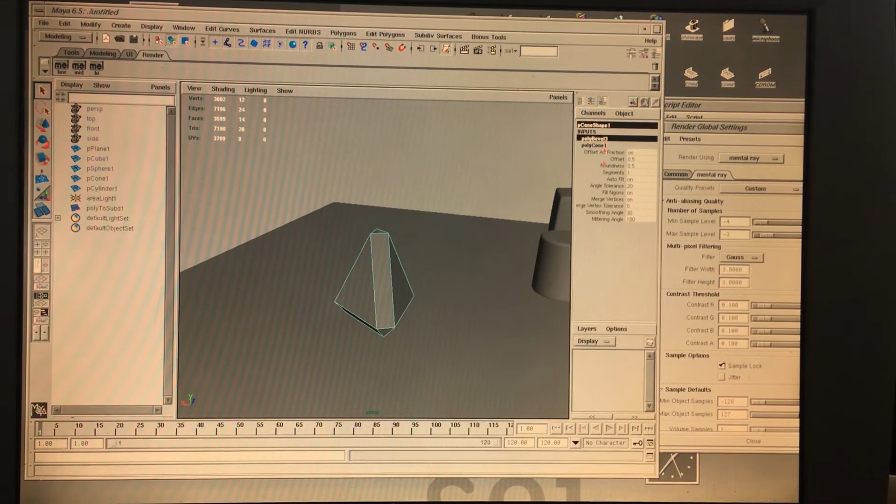This is fun. We're going to take this polycone. We're going to make it 3-sided. So it's like a little cone here. Right click edge. I'm going to grab all these guys. Shift right click with that wonderful marking menu. Hit bevel edge. Go up here to bevel, run the segments up once. Beautiful edges, beautiful thing. And then we'll take the offset, we'll make it a little tighter. And I'll take this one here and modify, Control D. See how that looks a little different here.

Modify, convert. This is one I should build into a marking menu. Polygons to subdiv, and then hit 3. Yeah, it's a really smooth triangle. So Control this guy over here. Control H, hide that guy.

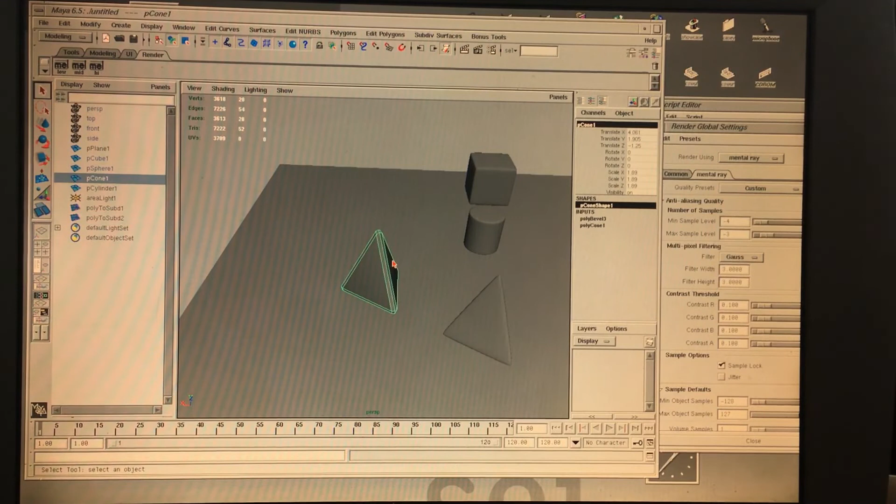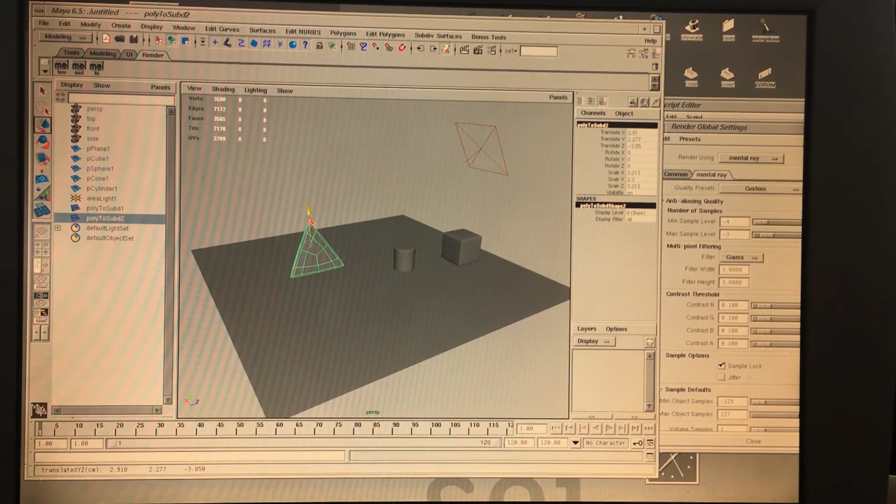And let's see here. I'm going to Control on that so I make it a little wider. I'm hitting the Control while holding the Y so I can widen the bottom without making it taller. And then I'll make it a little bigger. Get that guy there. Scale that guy up.

I should have converted that to subdivs. Let's see here. I'll make it continuity divisions 1 again, so we're back at the original. Let's see if I do 0. Is that the original? Yeah, that's the original. Control D, make a duplicate, modify, convert polygons to subdivisions. There we go. Control H to hide that guy, hit 3 on that.

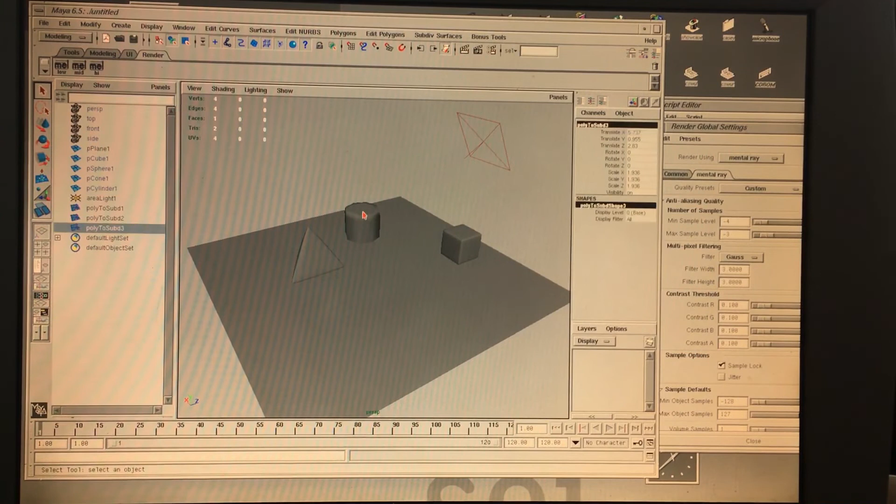So yeah, we've got these very low poly things that are subdividing, so they're smooth as if they're high poly, but they're just subdividing in real time. A neat looking little set of things here. And let's set that up. Let's deselect, shift right click, create a plane. This is kind of the same thing I did in the last tutorial, just setting up something. Middle mouse, drag that to here, zero it out so it's at the light.

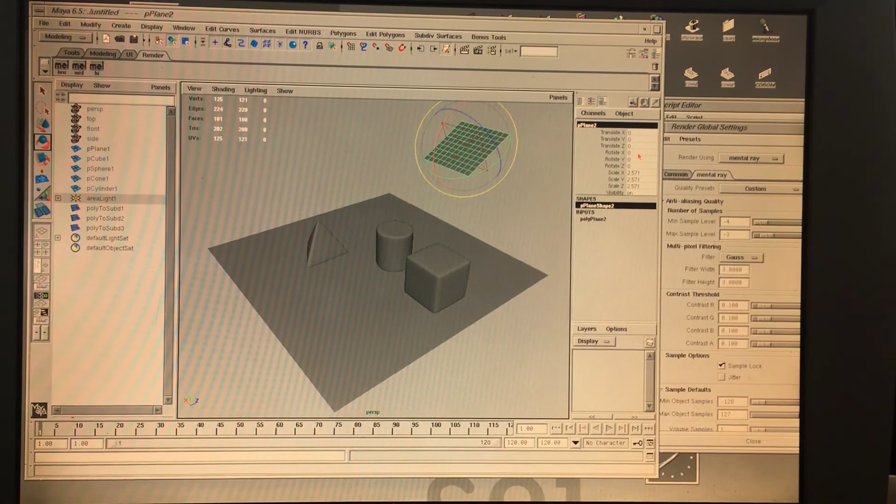Let's see, let's rotate, and I'll do it 90 degrees on the X. Yeah, 90. Move it behind it so we don't block the light. Right click, we're going to assign a Lambert. So it's a light. Okay. Let's duplicate this. I'll show you. We'll make one shader here and I'll just duplicate it instead of the way we did it last time. So I'll show you a little different thing.

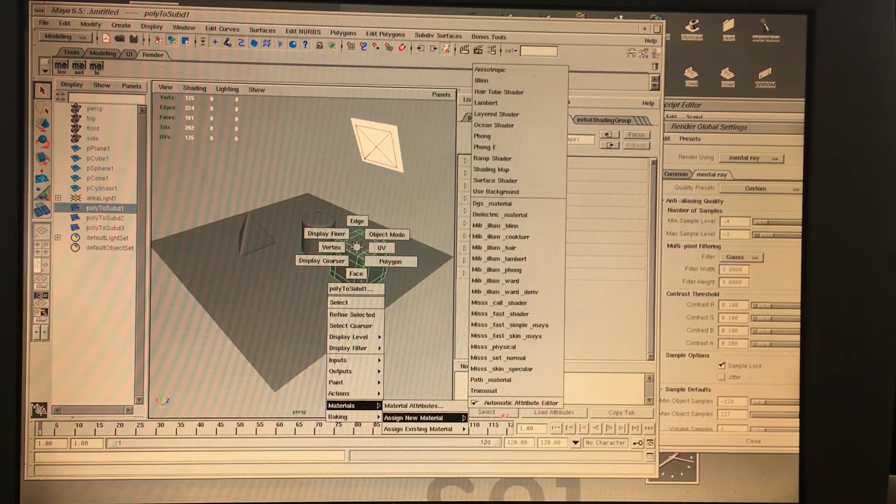So we'll create a new material, Phong E, and this will be our shiny_blue. Enter, and we'll make this blue, like I did before. This is going to look a little nicer with the area light. Turn the roughness down. And now, in order to save time, let's use our little menu, Control Shift Z, get the Hypershade.

And in order to not have to build that shader again, because it's what we want, go into the shiny blue here, and I'm just going to grab this guy down here, hit Control D to duplicate it, and hit Control D again to duplicate it again. And now, with that shiny blue, I could go grab this one, and we'll call this shiny green, because it's got all the settings we want already. It's a Phong already.

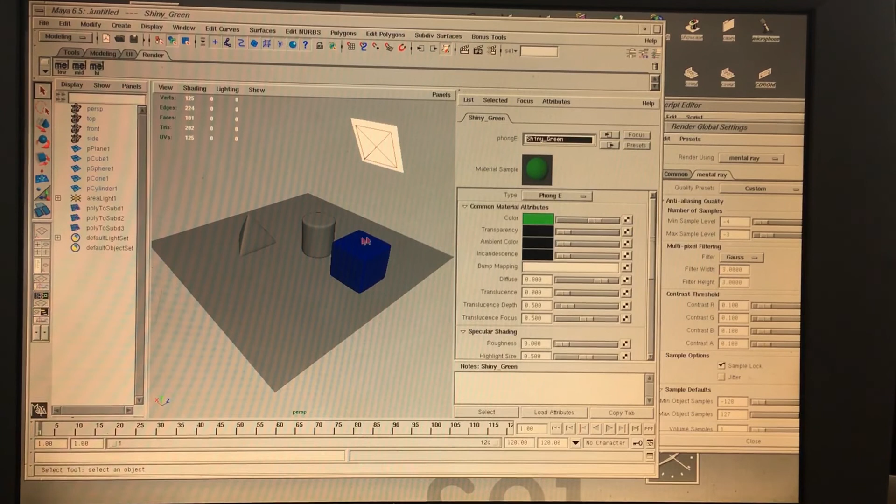And the same thing here with the other one. Put this over here real quick. Shiny red. A little quicker way to get through the process here. And then, yeah, so we've got what we need for those, accept. And now we'll just make you red and grab you and you green. It's way quicker duplicating and renaming after you set your first shader up.

Okay, and now let's use our settings. So we'll use our low, go in here to this mental ray. We've got the low settings. It's on like 640. Let's do 640 by 360, so it's kind of like an HD aspect ratio, right? Why isn't that giving me that thing? 640 by 360. Yeah, all right, it doesn't update the device aspect ratio, I guess, when you set it by hand. All right, so we've got that low on that.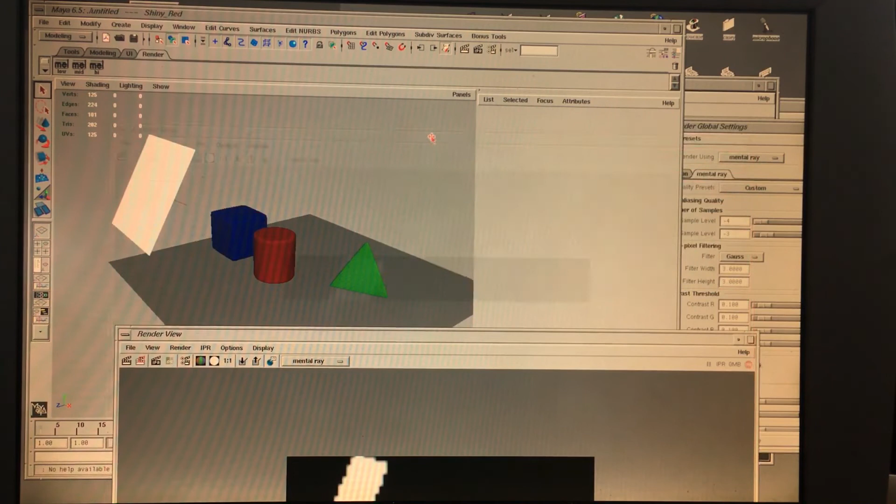Let's turn it on. Let's do a render and just see what kind of lighting we have. Since it's low, it should draw really quickly, and I can set the value of the light quickly. Alright, wow, what do we have here? I don't see the triangle at all. I must have turned something off here. Let's see. What is going on with you?

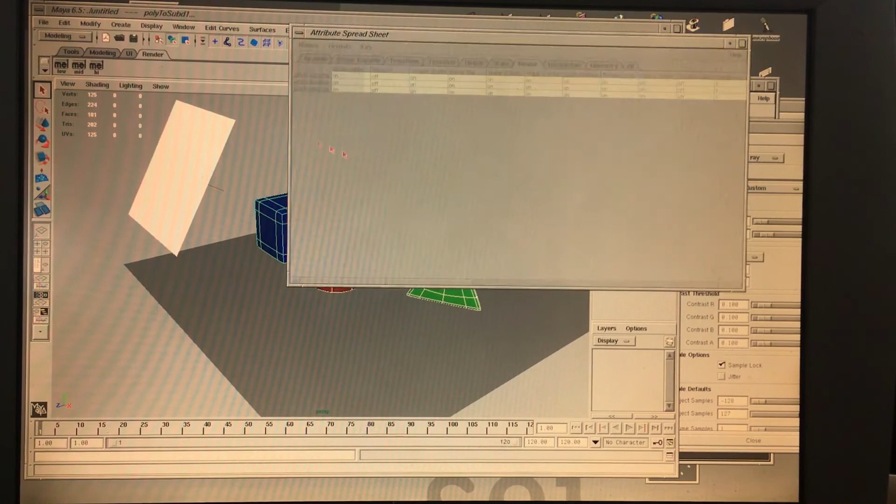Visibility on. Let's check our render stats here. Are these all the same? Control Shift Z, attribute SS. It's weird. I don't see that character in the render at all. Control D, duplicate. Hit the render again.

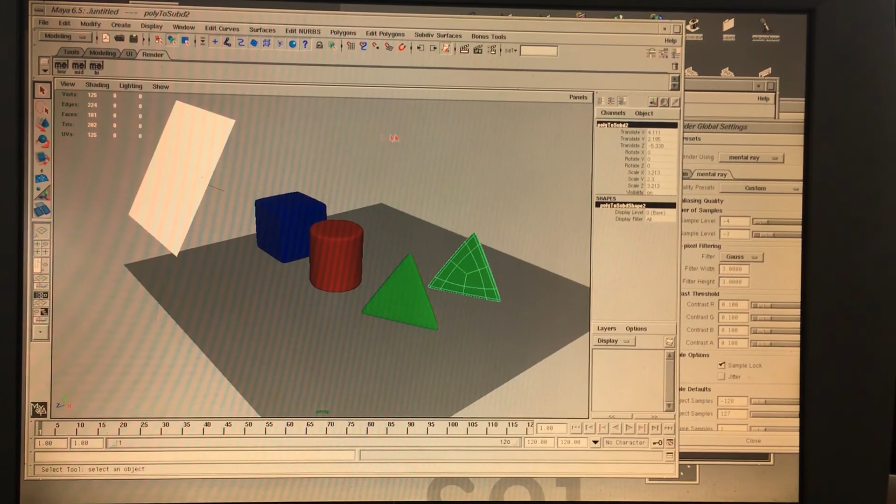Wow, our triangle doesn't appear. That is interesting. What is causing that? How do we troubleshoot this? Visible. It doesn't like the subdivide. All right, let's see. Can I have the polygon version back? Shift, select both those guys. Control H. I do have the cone here hidden.

Shift H here. I'm gonna do that, and we will apply materials, existing materials, the shiny green, and we're gonna subdivide that smooth. And I need to do that probably up to level 3 to get it as smooth as the other thing. All right, let's try to scale that up here and make it pretty.

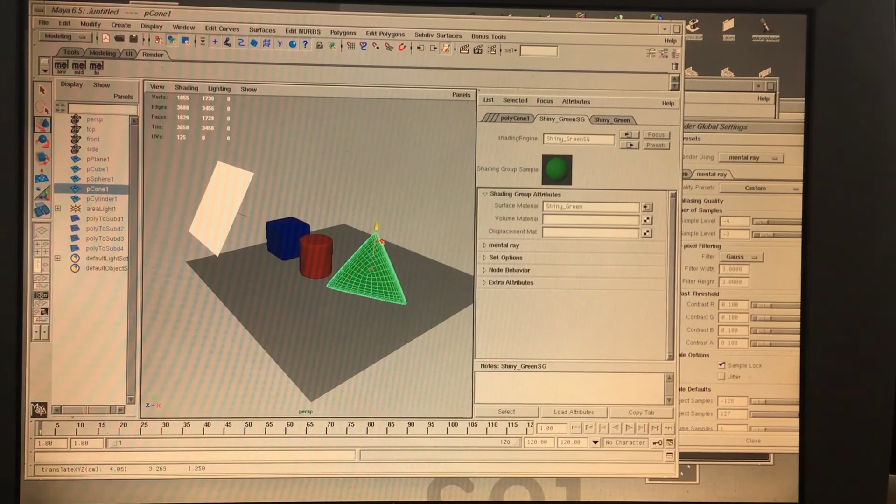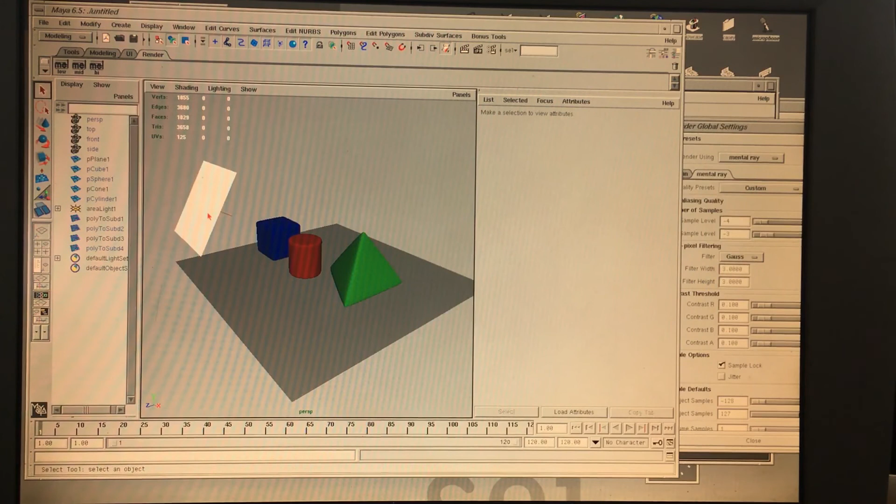All right, so let's click this guy and see. I'm not quite sure why that item wasn't showing up. But we have fast feedback loop, which is great when we use these low settings. Okay, so there we are. We're starting to see some things. And we just need to turn the light up. So let's turn that down. And now, instead of having to go up to 100 something, let's just do it at like 15. It's probably plenty. Hit this guy.

Oh yeah, it's too bright. But it's a nice fall off here. Okay, so you have all those things here. Turn that down. So 15 is too high. Let's try 8, because it's not falling off as much as the old one. So let's try 8 and see if that looks good. Yeah, it looks pretty good.

And then I can do a little ambient light here. We'll add, create light, ambient light. It'll be a little too bright to start. So let's pull the intensity down to 0.030 or something like that. Hit that. Let's try the mid range now. Hit the mid, and now we'll see I'm at -2, -1. We get a little bit better of a picture of it, but it still won't take as long.

And we're low res right now. We're not using a super high res, using a 640 by 360. So it should still draw pretty fast. This is a 400 megahertz O2. You can see it's getting through it pretty good. Yeah, it looks pretty good. And now I like that light level. Nothing's blowing out. The ambient light's giving us a little bounce, a little fake GI.

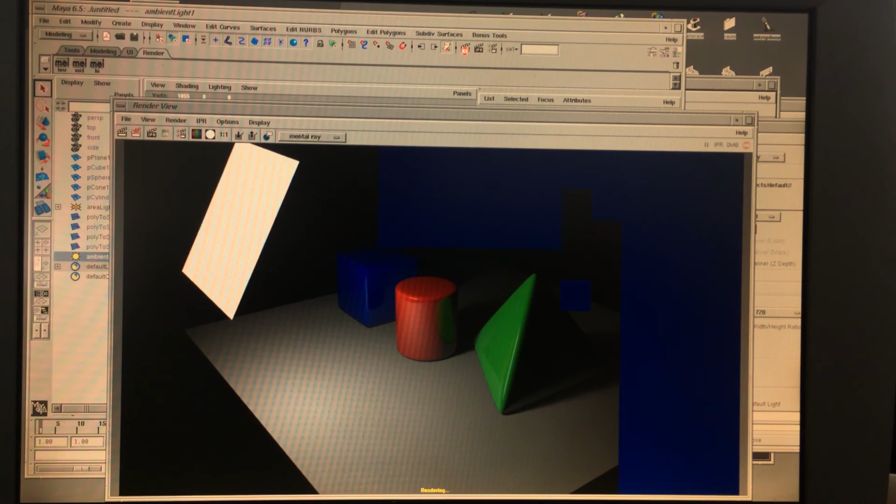And if you get deeper into scripting, there was this website where you go for tutorials. I used to have a subscription there, and there's like MEL scripting for artists, and it gave you a good breakdown of what an integer is, what a string is, what a float is, and how to use those saved to those $ variables with for loops and if statements, and it helps you extend functionality in Maya. It's what I do a lot at work to create macro functions, so one button does a lot of things to a lot of items.